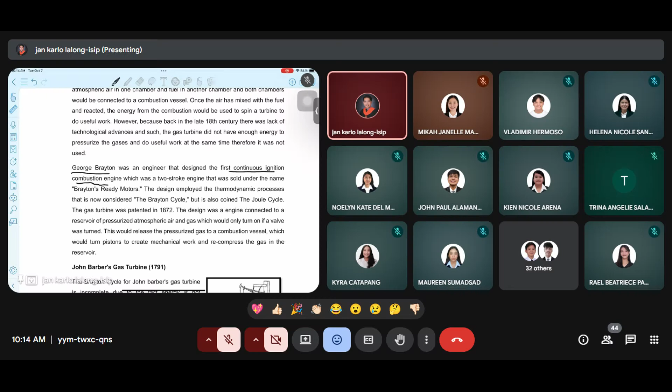Okay, so yung gas turbine ni John Barber's, the Brayton cycle for John Barber's gas turbine is incomplete. This is due to the fact energy is not redirected into compression of the initial gases. So yet, because this was one of the first prominent gas turbine engines ever created, it still holds much significance. So dito pa din nanggaling yung ating idea na pwede palang magkaroon tayo ng ating gas turbine.

Okay, so George Brayton have his gas turbine in 1872. So ang tagal bago siya nasundan yung kay John Barber's. So George Brayton's gas turbine was first and most prominent fully operational gas turbine that implemented the Brayton cycle.

So yung gas natin is pressurized and held in the reservoir. So we have this, and then when the valve would release it to move through the tunnel B and will be ignited at the chamber C. Okay, so this will be pressurized and then pupunta yan sa ating chamber C.

So this is an isobaric process due to the fact that any increasing ng pressure would just push the gas out of the engine. So when the work is done and the piston D, the mechanical work can be employed for the variety of things such as the generation of electricity or movement.

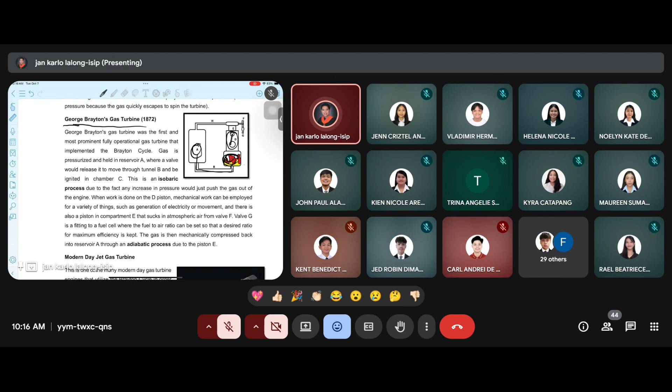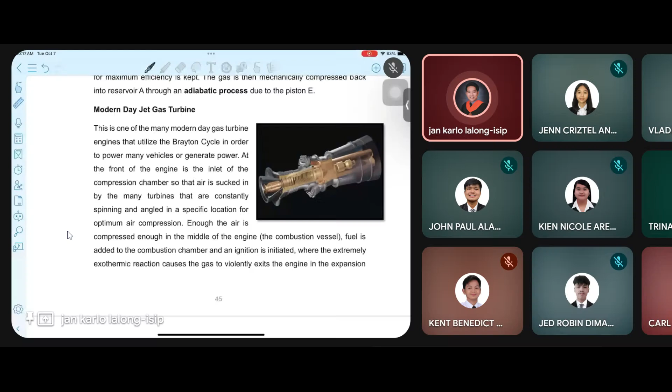Okay, so ano ba yung ating modern day jet gas turbine? So ito na yung mga ginagamit natin sa our energy generation. So this is one of the many modern day gas turbine engines that utilizes our Brayton cycle in order to power many vehicles or generate power. So pwede siya to power a vehicle, but then that is different vehicles, hindi na yung nakikita lang natin sa kalsada.

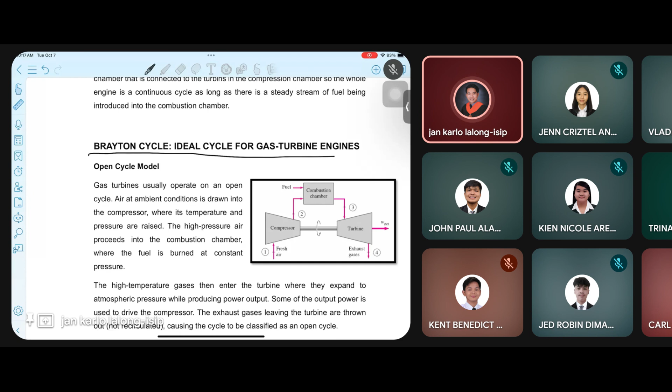Ayan, so discuss na natin. So we're going to discuss the Brayton cycle, kung paano ba yung ating working principle and paano yung model natin ng ating Brayton cycle. So as we discussed last time, kapag we have the Otto cycle, syempre we are using gasoline as our fuel. Kapag diesel, syempre diesel yung ginagamit natin. So how about kaya kapag sinabi nating Brayton cycle, ano yung ginagamit nating fuel kapag Brayton?

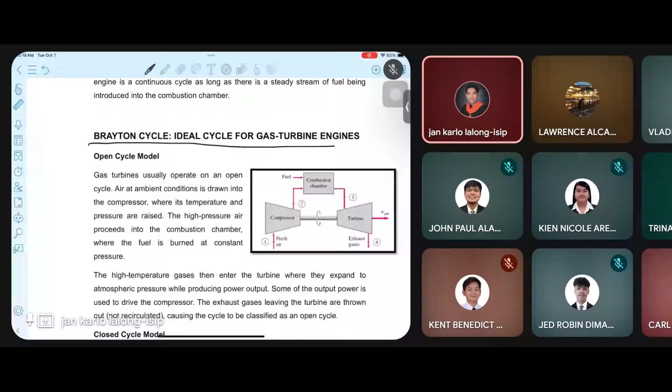Nandito ba si Alcantara? Yes, sir. Okay, so ano yung ginagamit nating fuel when we are dealing with Brayton cycle? Natural gas po. Yes, we are using gas or the natural gas natin.

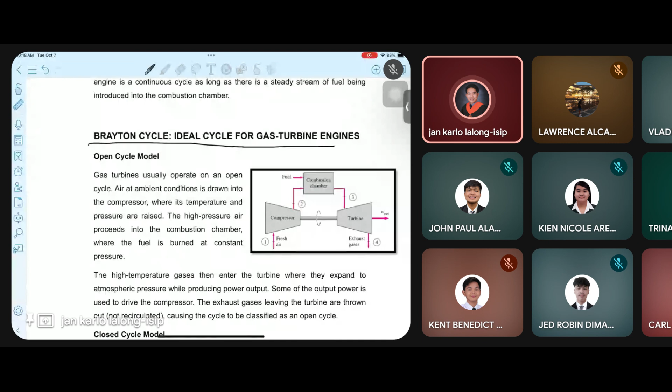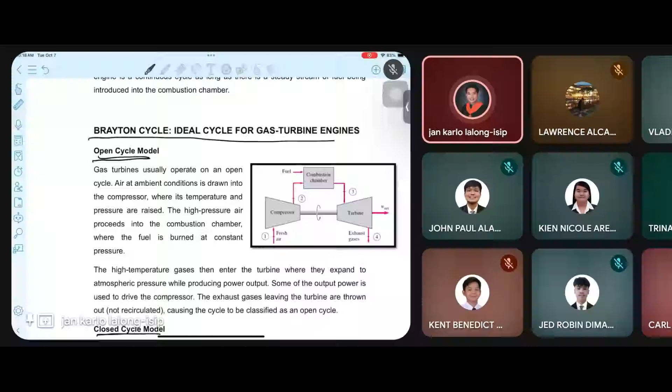Okay, so let's discuss first ano ba yung ating working principle ng ating Brayton cycle. So we have two models dito. Yung una natin, we have the open cycle model and we also have yung ating closed cycle model. So sa open cycle model, gas turbine usually operate on an open cycle. So ito yung madalas nating makita.

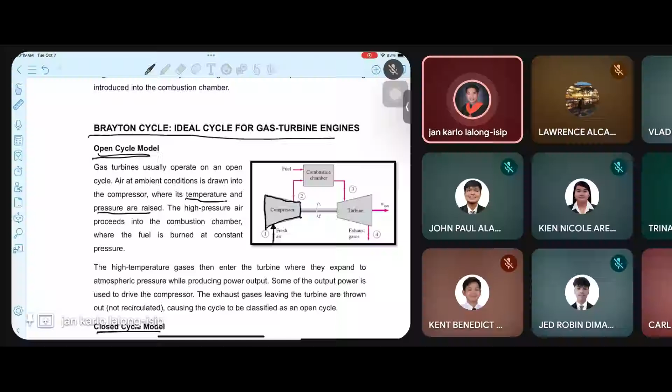So air at ambient condition is drawn into the compressor. So we have here our compressor, and then syempre kukunin niya, papasok sa kanya is our air, and then i-compress niya. So pag kinompress natin, syempre tataas yung ating pressure. So air at ambient condition is drawn into the compressor where the temperature and pressure are raised. So yung compressor natin that is responsible for increasing the temperature and pressure ng ating air.

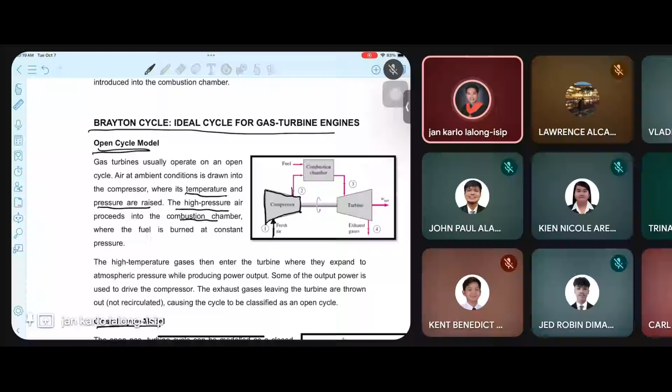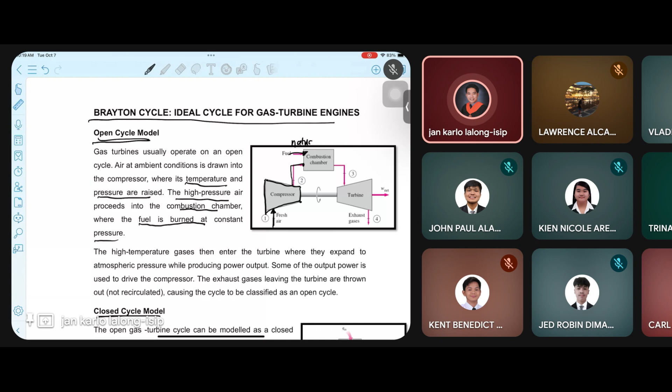The high pressure air proceeds to the combustion chamber. So kapag na-compress na yung air natin, dadalhin na yan sa ating combustion chamber. So in our combustion chamber, the fuel is burned at constant pressure. So dito na natin i-inject yung ating fuel. So ano nga yung fuel natin? Siyempre, that is our gas or natural gas natin. So i-inject natin yung fuel with our compressed air. So mangyayari na yung ating combustion.

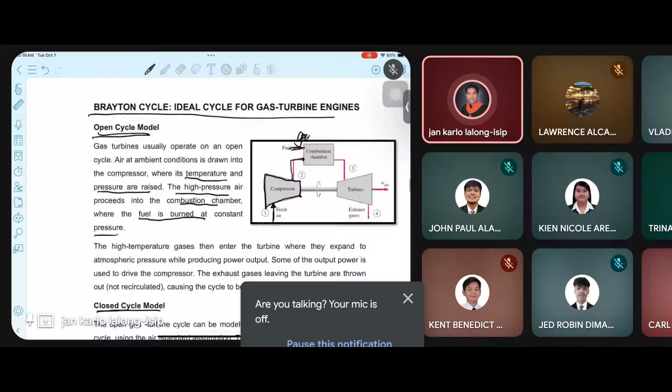And then the high temperature gases then enter the turbine where they expand to atmospheric pressure while producing the power output. So yung ating high temperature gases from the combustion chamber, siya yun naman yung magpapagalaw sa ating mga turbine.

And so some of the output power is used to drive the compressor, and the exhaust gases leave the turbine are thrown out, not recirculated, causing the cycle to be classified as an open cycle. Okay? So yung work output ng ating turbine, yung ibang power nito will make our compressor na gumana or gumalaw. And then it will repeat our cycle. So yung ating work na manggagaling sa turbine, dalawang klase yan. Yung isa babalik sa compressor and then yung isa is the work output.

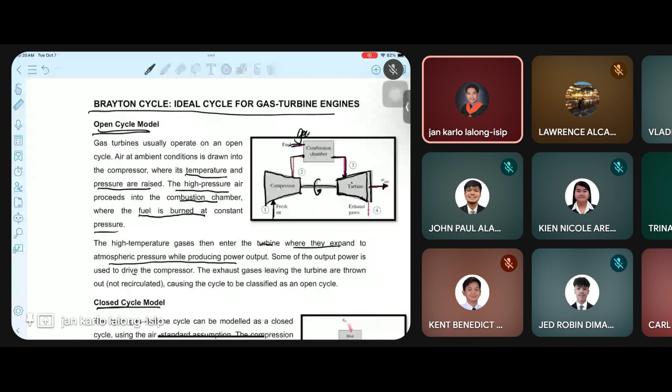That will be the work output of our cycle. And then the exhaust gases will just go out to our environment, it won't be reused. So that is our open cycle model.

In some cases, like in the power plant, the output of our gas cycle still has high temperature exhaust gases. So these high temperature exhaust gases are used to heat our steam, making the power plant a combined cycle. It will be running in Brayton cycle, and the output will be used to power our steam power plant. So the exhaust gas is used to heat our steam.

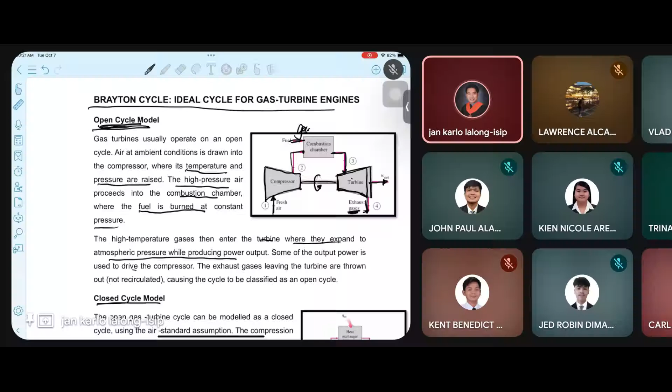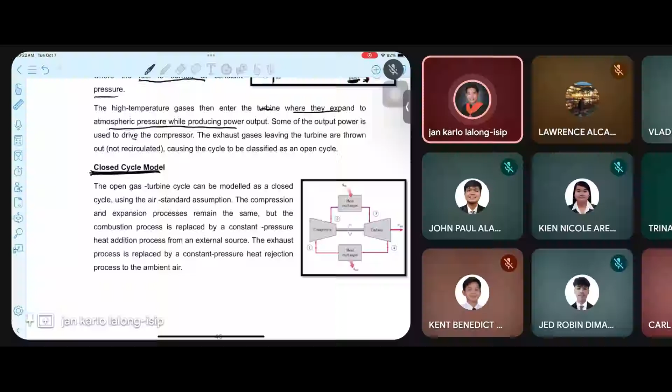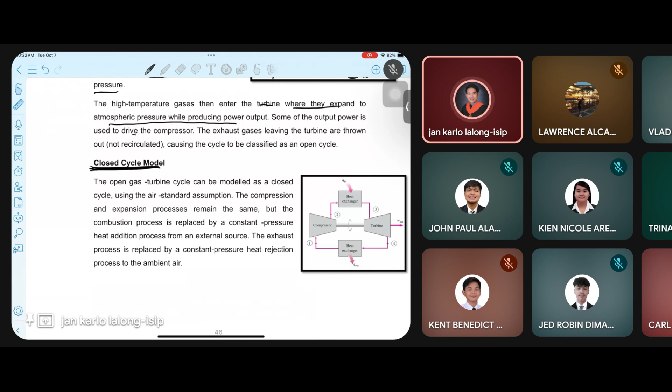So what do we mean by closed cycle model? The open gas turbine cycle can be modeled as a closed cycle using the air standard assumption. The compression and expansion process remains the same, but the combustion process is replaced by a constant pressure heat addition from an external source.

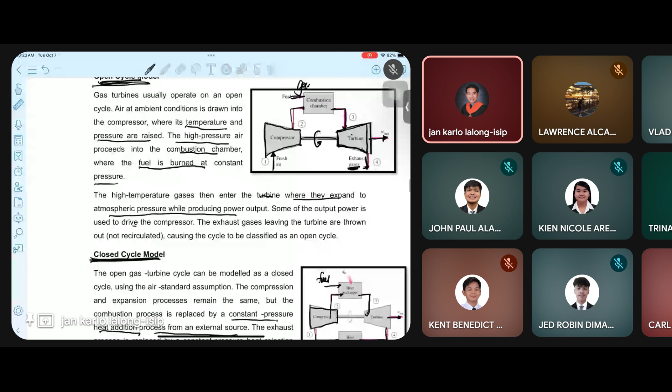So we've seen the difference between our open cycle and closed cycle method model. Do you have any question before we proceed?

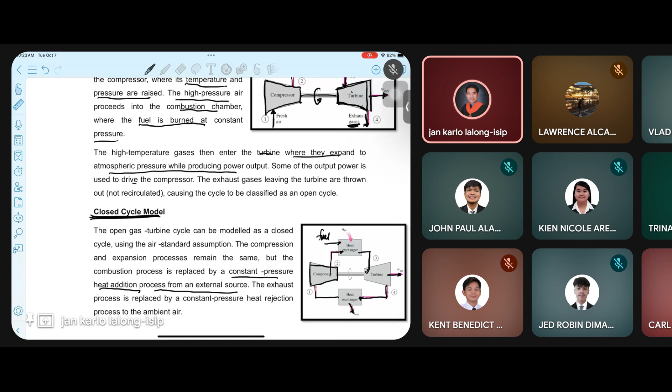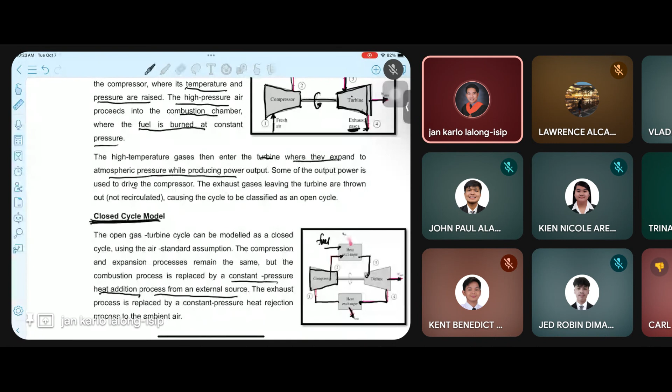Hello? Okay, wait, there's a bit of delay. But can...

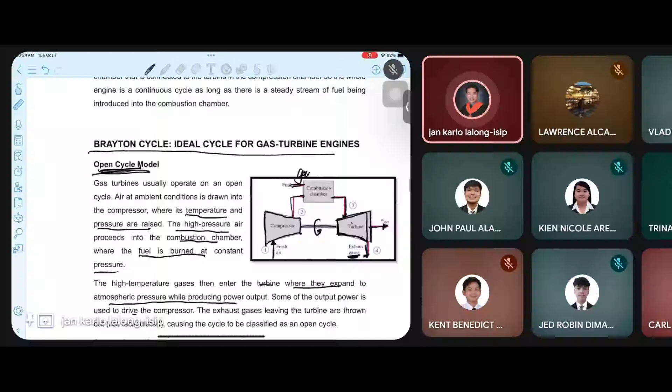So are we okay now? Can we proceed with the formulas and how we are going to analyze our Brayton cycle? Okay.

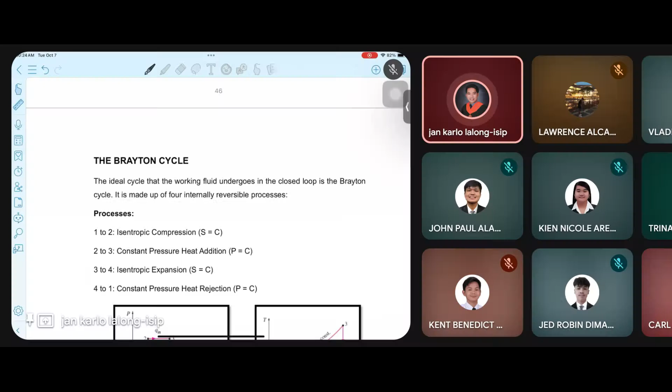Okay, so let's proceed with our Brayton cycle. Our Brayton cycle, the ideal cycle that the working fluid undergoes in a closed loop, is made up of four internally reversible processes. So what are our processes?

We still have our isentropic compression. Using a compressor, the air will be compressed isentropically. So we have isentropic compression, and then constant pressure heat addition. After that, we are going to have isentropic expansion, which is in our turbine. And then we are going to have constant pressure heat rejection, and then it goes back to our cycle towards our compressor.

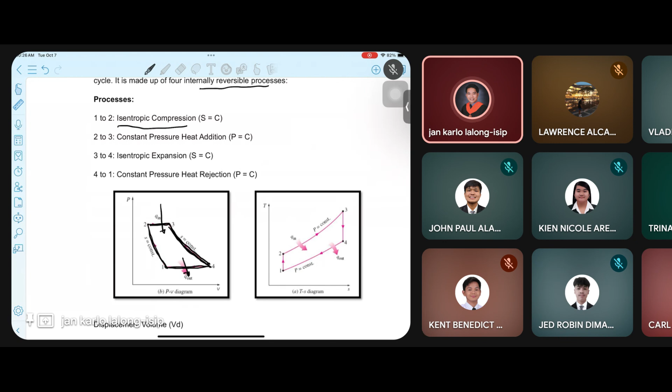Okay, so this will be our PV diagram, and this will be our TS diagram. We have isentropic compression, then constant pressure heat addition, isentropic expansion, and constant pressure heat rejection. And then for the TS diagram, it's still the same - isentropic, constant pressure heat addition or isobaric heat addition, isentropic expansion, and constant pressure heat rejection.

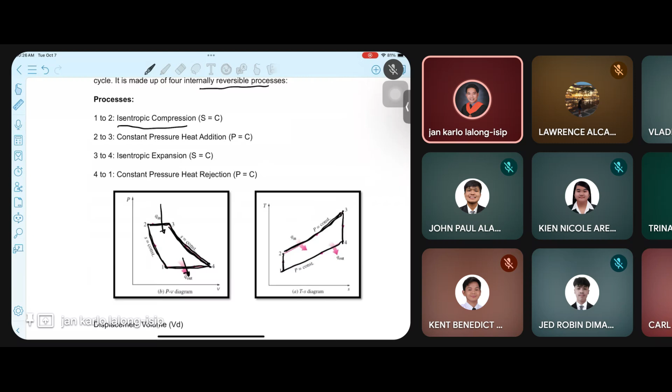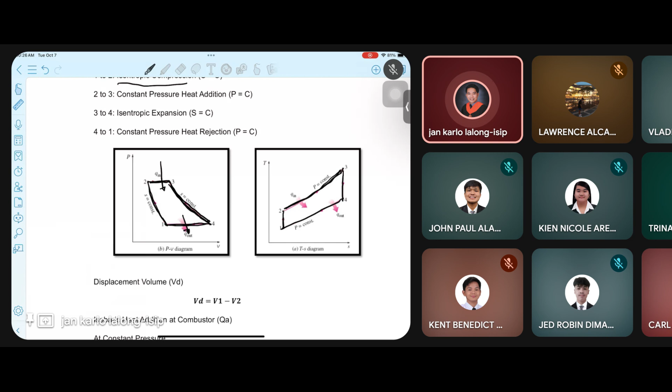Okay, so you should know the difference between our processes from Otto, Diesel, and then we still have the Dual cycle up to this Brayton cycle. So what are the formulas we are going to use when analyzing our Brayton cycle?

So it's still the same for our volume displacement. Our volume displacement is V1 minus V2. So that is the displacement of volume in the compressor.

And then we have the isobaric heat addition. Since it's isobaric, our formula for the constant pressure heat addition will be M Cp delta T, so we have M Cp, T3 minus T2.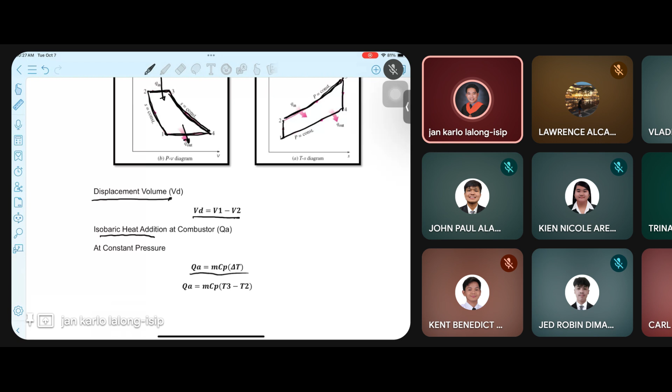Next, we have the isobaric heat rejection. Again, that is isobaric, so our formula will be M Cp delta T, that is M Cp, T4 minus T1.

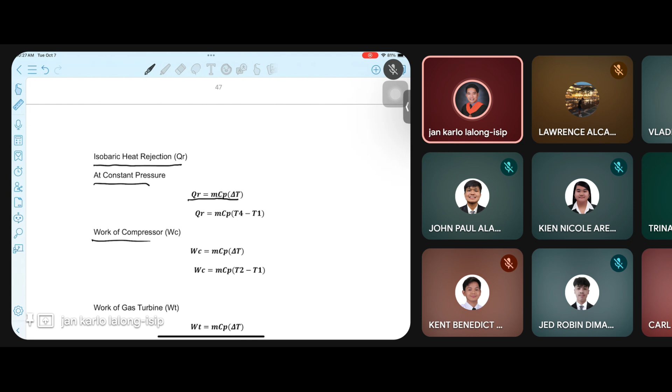For the work of our compressor, we have M Cp delta T, that is M Cp, T2 minus T1. For our work of the gas turbine, that is M Cp delta T, that is M Cp, T3 minus T4.

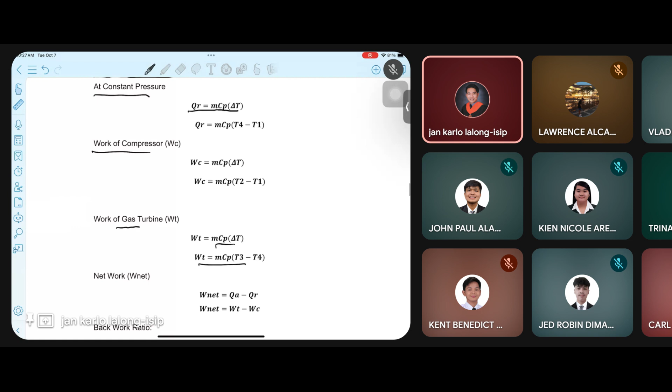For our net work, that is the heat added minus our heat rejected, or the work of the turbine minus the work of the compressor. So if given the work of the turbine and compressor, we can use that to solve for the net work. If given the heat added and heat rejected, we can also use that.

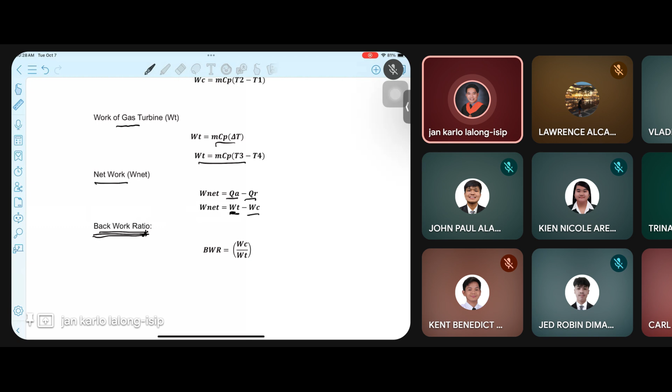So now we have what we call the back work ratio. This will be the ratio of the work that goes back to our compressor. So how are we going to solve for our back work ratio? That is our work of the compressor over our work of the turbine.

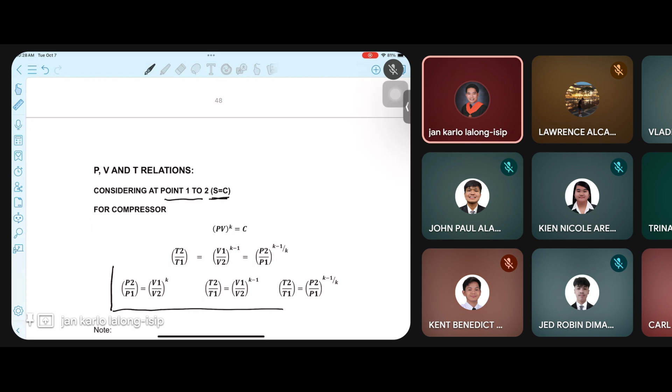Okay, so for PVT relations, from state point 1 to 2, that is still isentropic. So we still use the same formula to analyze the PVT relations from state point 1 and 2 - we still have the relationship of pressure-volume, temperature-volume, and temperature-pressure.

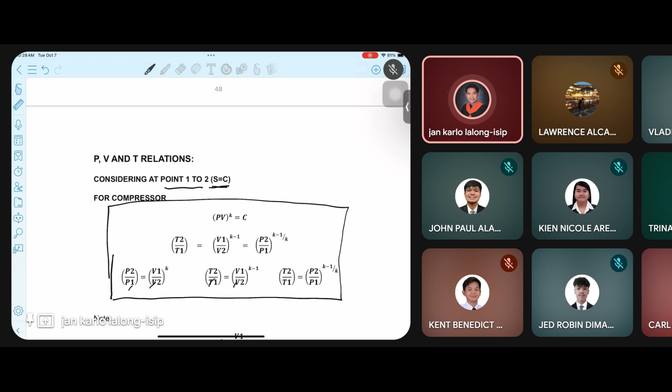So we still have our compression ratio. Our compression ratio is V1 over V2. And then our pressure ratio, that is the pressure ratio at state point 1 and state point 2. This is different from our pressure ratio with our dual combustion. So when we say compression pressure ratio, that is P2 over P1.

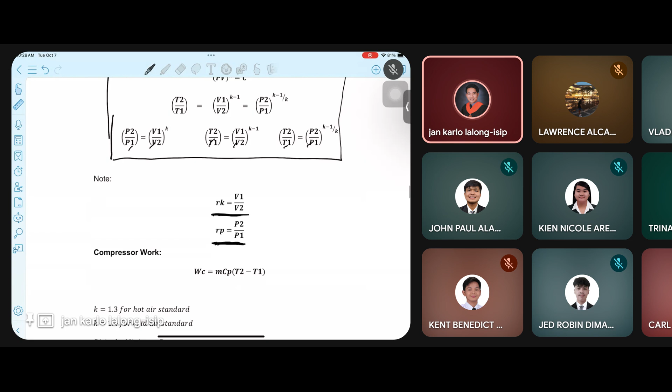And then for the compressor work natin, that is MCP times T2 minus T1. And then, ano pa ba?

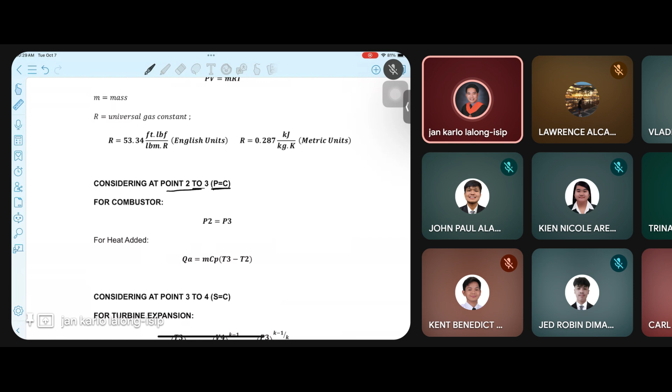Point 2 to 3 natin, that is a constant pressure heat addition. So we have MCP, T3 minus T2.

And then, Point 3 to 4 natin, again, that is isentropic. So ito pa din yung ating gagamitin, pareho pa din naman doon sa ating ibang expansion processes. Basta siya ay isentropic, ito yung mga gagamitin nating relationship. Nababago lang yung ating mga state points na gagamitin.

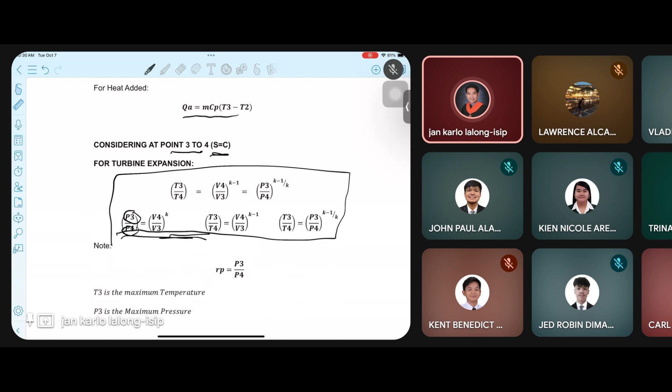Okay, so we still have our pressure ratio naman at state point 3 and 4. So pwede din natin kunin yun, we have P3 over P4.

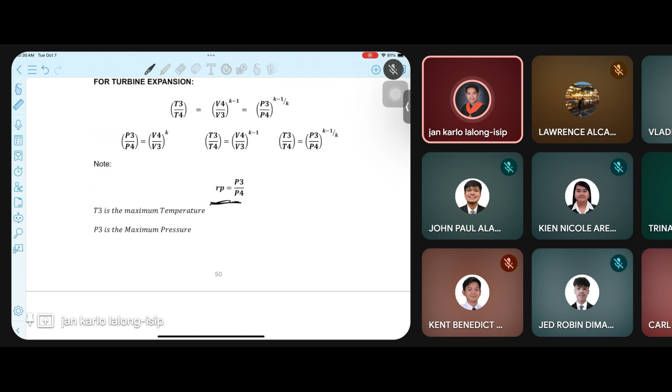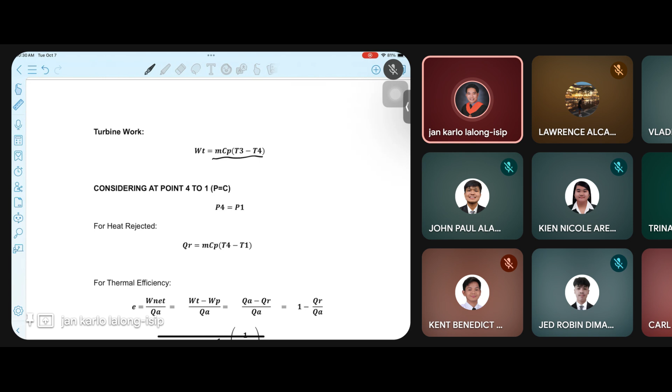So we have the turbine work. Ang turbine work natin is MCP T3 minus T4. And then at point 4 to 1 natin, that is a constant pressure, so we have MCP T4 minus T1.

Ang thermal efficiency naman natin, we have this formula. Yung pa din naman, that is the work net over our QA. So I think ito ay work ng compressor.

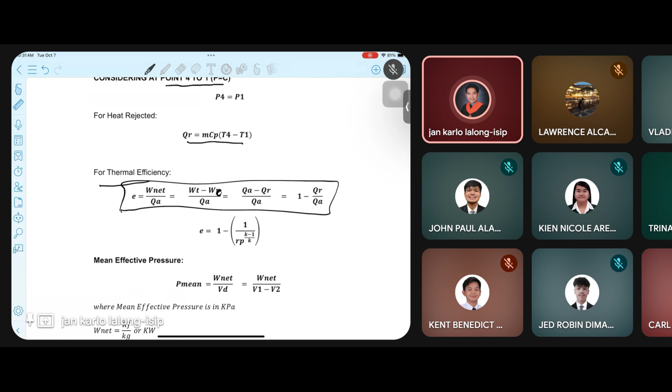Okay, so work ng turbine minus work ng compressor over our heat added, or kaya our Q added minus our Q rejected, or the heat added minus heat rejected over our heat added. And then kapag sa naman ang in terms of our pressure ratio, that is 1 minus 1 over RP raised to K minus 1 over K.

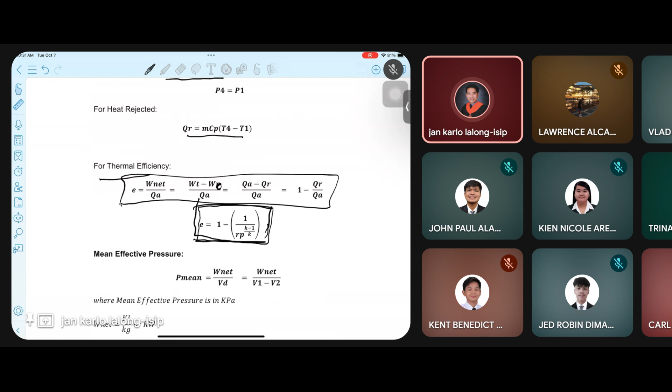So we have another formula for our efficiency. Pero mas maigsi yan compared sa ating dual combustion cycle, so mas madaling sa uluhin kapag this is our formula in Brayton cycle.

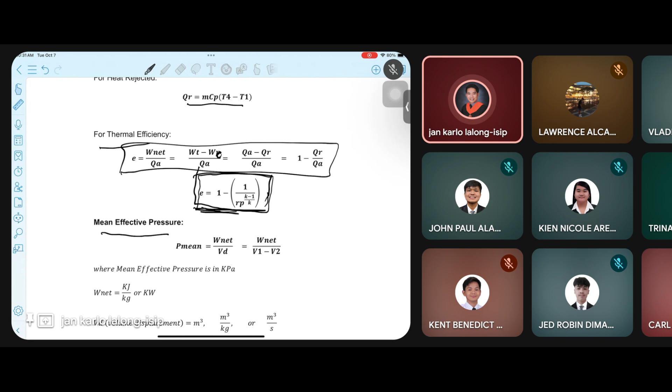Mean effective pressure naman natin, still the same pa din naman yung ating ginagamit para makuha yan. We have our work net over our volume displacement.

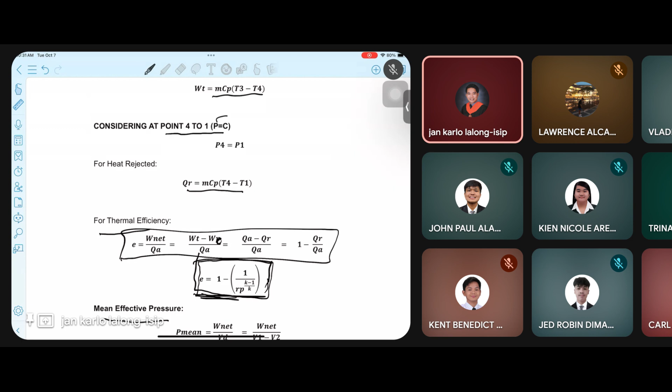Ayan. So, do you have any question muna before we proceed with our sample problem? Okay, so can we proceed na? Ayan, so proceed tayo with our sample problem sa Brayton.

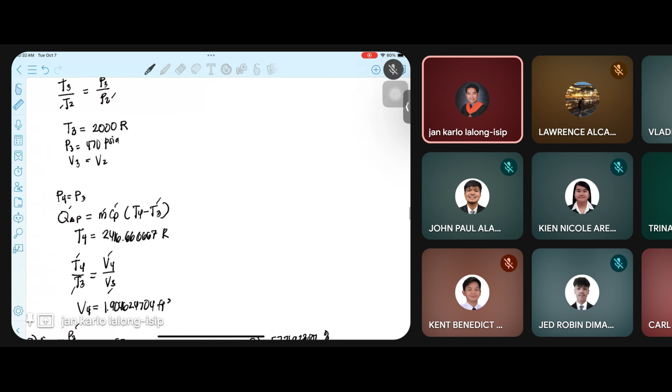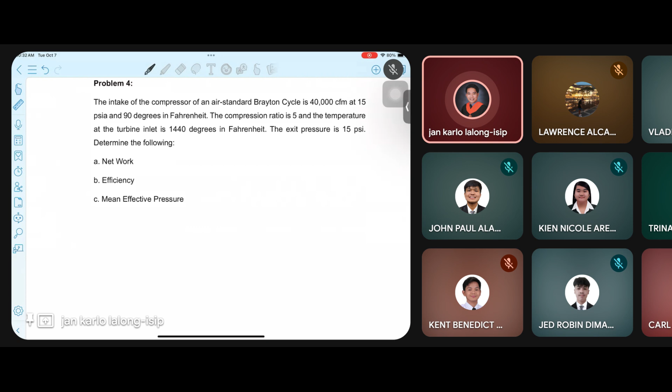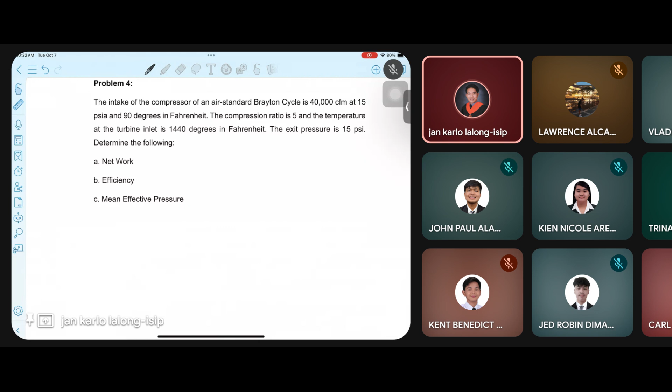So, for problem number 4 natin, punta na lang kayo sa ating lecture notes, sa ating sample problem number 4. Again, after this class, I will be going to have assignment sa classroom nyo wherein you are going to solve yung ating example na to. So kindly follow ngayon pa lang yung pagsosolve para may maipasa na din kayo mamaya, para madali nyo nang magawa yung inyong maipasa.

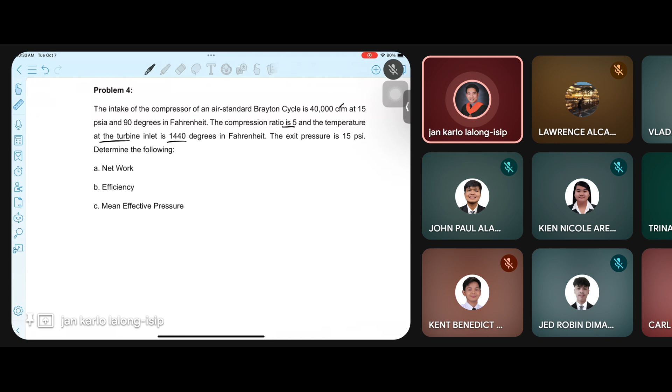Okay, so for our problem, the intake of the compressor of an air standard Brayton cycle is 40,000 cubic feet per minute at 15 psia, pound per square inch, and 90 degrees Fahrenheit. So the compression ratio natin is 5, and the temperature at the turbine inlet is 1,440 degrees Fahrenheit. Binigay din yung ating exit pressure na 15 psi, and we are going to determine our net work, our efficiency, and our mean effective pressure.

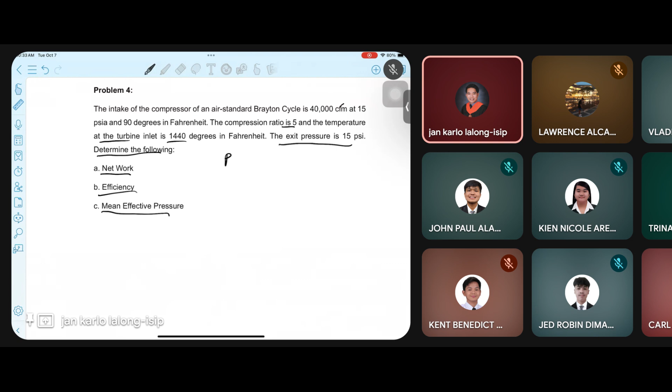Okay, so unahin lang natin muna yung ating PV diagram. So we have our PV diagram dito, and then we have isentropic compression, and then constant pressure heat addition, and then isentropic expansion sa ating turbine, and then we have here our constant pressure heat rejection. So we have state point 1, 2, 3, 4. Dito yung ating heat added, dito yung ating heat rejected.

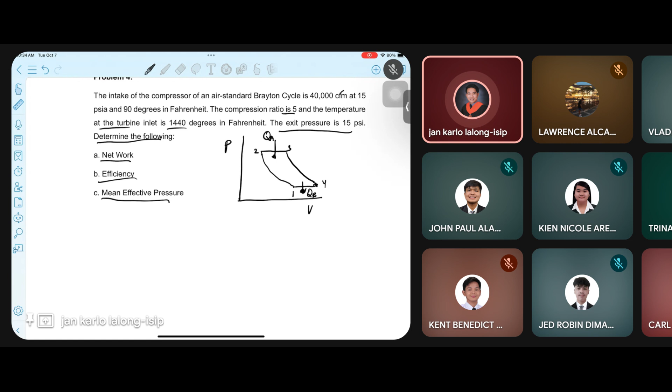Ayan, so next natin, let's write ano ba yung mga given natin dito. So we have our volume 1. Sabi dyan, our volume 1 is 40,000 cubic feet per minute. So our V1 is 40,000 cubic feet per minute. And then our P1, that is 15 pound per square inch. And then ang ating temperature 1 is 90 degrees Fahrenheit. Our compression ratio is 5.

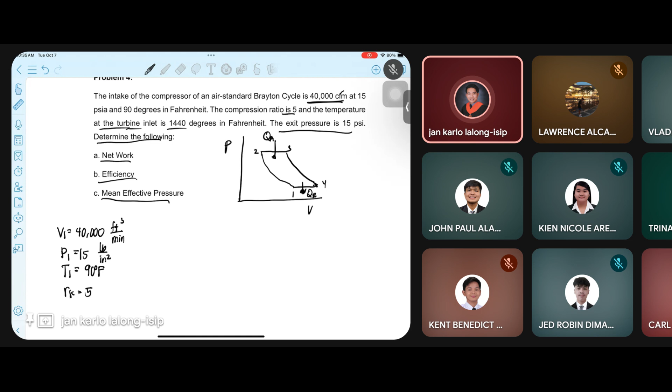And the temperature natin ng turbine, so ano kaya yung ating temperature natin, yung 1,440 natin? Sabi dyan that is turbine inlet. So anong pressure natin yan? Let's have si Kokosa. Is that pressure 1, 2, 3, or 4? So may pressure 1 na tayo. So anong pressure natin yung ating, anong temperature pala, sorry. Anong temperature natin yung ating 1,440? So that temperature, inlet siya ng ating turbine.

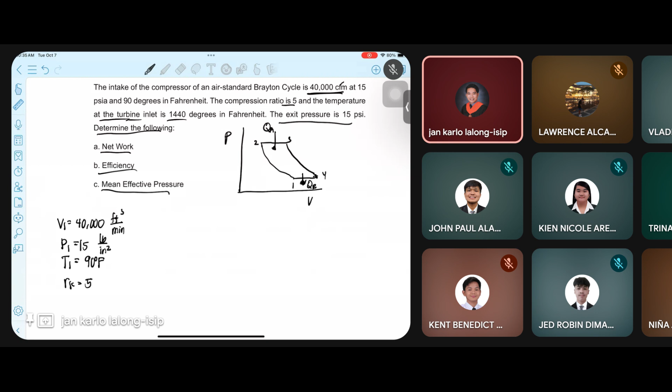So that is our T2 po, sir - hindi, I mean, yung ating point 2, papasok to ng ating combustion chamber. And then, sa point 3, ito naman yung papasok sa ating turbine. So yung ating 1,440, that is our T3 po. Ayan, and that is 1,440 degrees Fahrenheit.

So, how about yung ating 15 PSI? Sabi that is our exit pressure. So ano kaya yan? Is that our pressure 1, 2, 3, or 4?

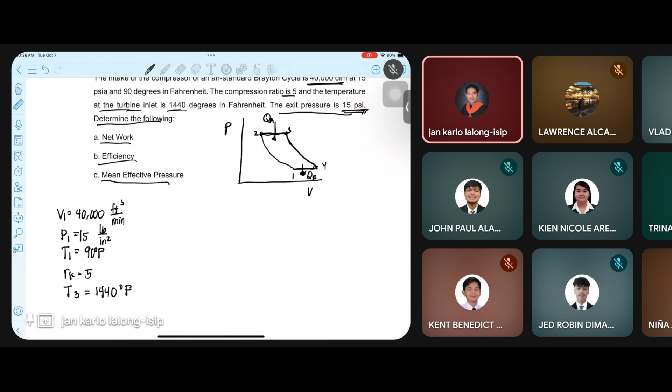Buwan? Sir, nagpaalam po si Okay. Pa-message na lang din sa akin ng reason. Pero kung naka-message na, tingnan ko na lang mamaya.

Sarabia? Sarabia, ano kaya yung ating 15 PSI? Nandito ba?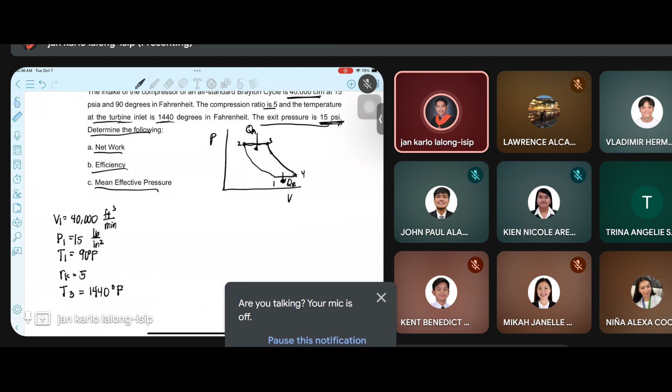Wala ata si Sarabia. Catapang.

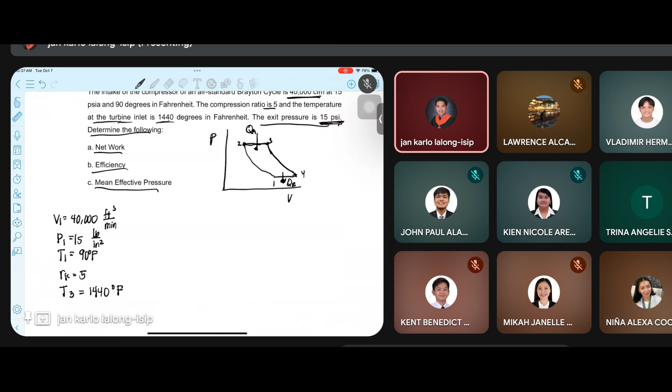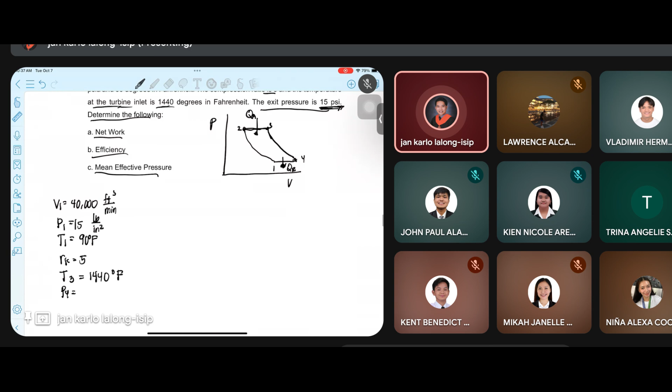P4 po, sir. Okay, so that is our pressure 4, kasi that is the exit pressure. Yung exit pressure natin, that will be the pressure exiting our turbine. So we have P4 natin na 15 pound per inch squared.

Okay, so let's convert muna natin yung ating mga values. So tulad nito, yung ating volume flow rate, let's make it in seconds, para din later mas madali tayong mag-convert.

So let's have, kung gagawin nating minute yan, our 1 minute is equals to, gawin nating seconds, that is 60 seconds. So what will be the value natin ng V1? Paki-convert naman. Patulot.

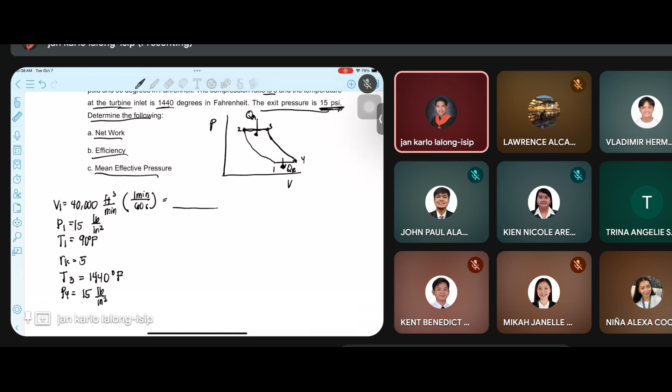Paki-compute. Ano makukuha natin dito? Sige. We have 666.666667 cubic feet per second na siya.

So paki-store na lang para madali yung ating value. Store nyo na yan ngayon.

And then, how about itong ating temperature 1? Make it in absolute value nga. Aguila, Marilay. Paki-convert into absolute scale. 550 R po, 550 Rankine.

How about itong 1,440 natin? Kilyes. Wait lang po. Sige, paki-convert. 1,900 Rankine po, that is 1,900 Rankine.

Okay, so I think we can proceed with our solution. So, ilagay na lang yung required, which is itong mga ito. So, puproceed na ako sa ating solution.

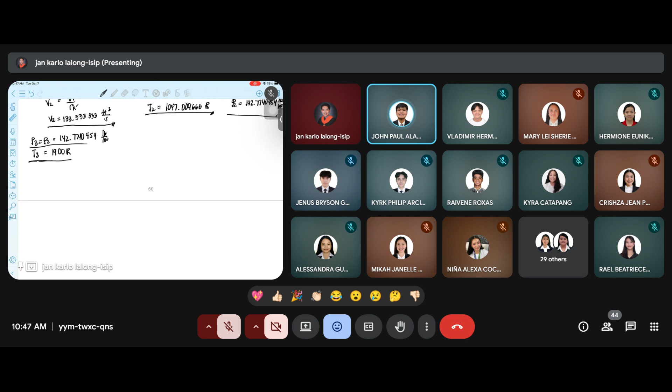T3 over T4 equals to P3 over P4 raised to K minus 1 over K. So para makuha yung T4 natin, i-shift solve niyo nang mabuti.

May value tayo ng T3, P3, at P4, at may value naman tayo for K. Pakisolve, ano yung makukuha nating value for T4? De Los Santos.

Nandito ba si De Los Santos? Yes po sir, nag-solve na po. Okay sige.